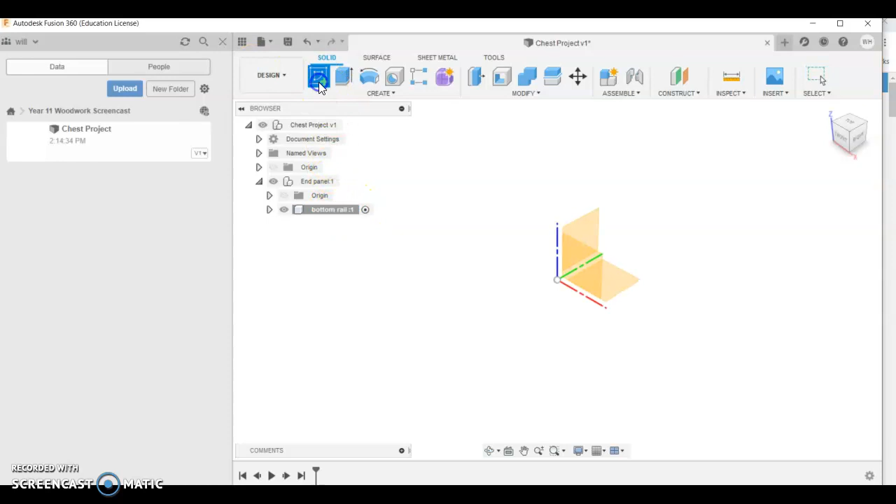You can see the activation dot is selected for that bottom rail, and we're going to start to draw it. I'm going to draw it on any plane, that's fine for this one. I'm going to draw a rectangle, so this is going to be our material size at 42 by 19.

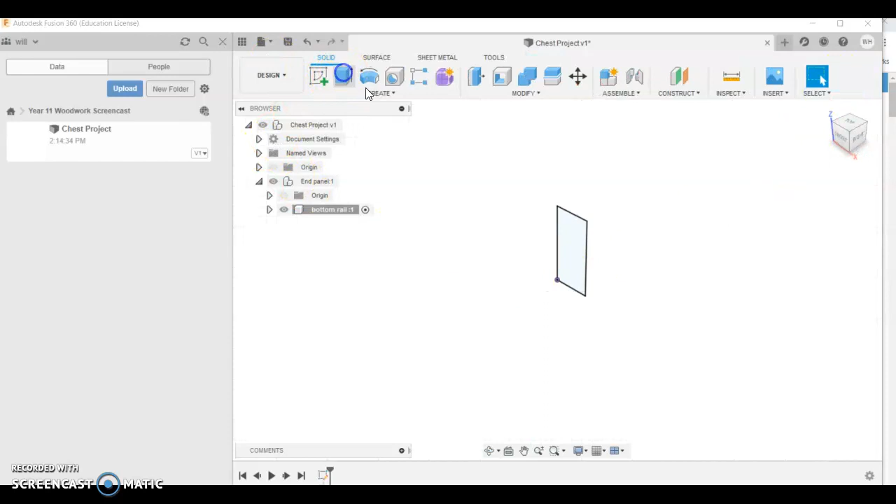The first, for the end panel, it's a 200mm rail. So once we've got the 42 by 19, we're going to finish it and extrude our work. So that's going to be 200. So we've got a piece of 42 by 19, 200 long.

Next thing I'm going to do is cut the groove in here. So I'm going to select the end and create a sketch. We're going to do a rectangle on the end.

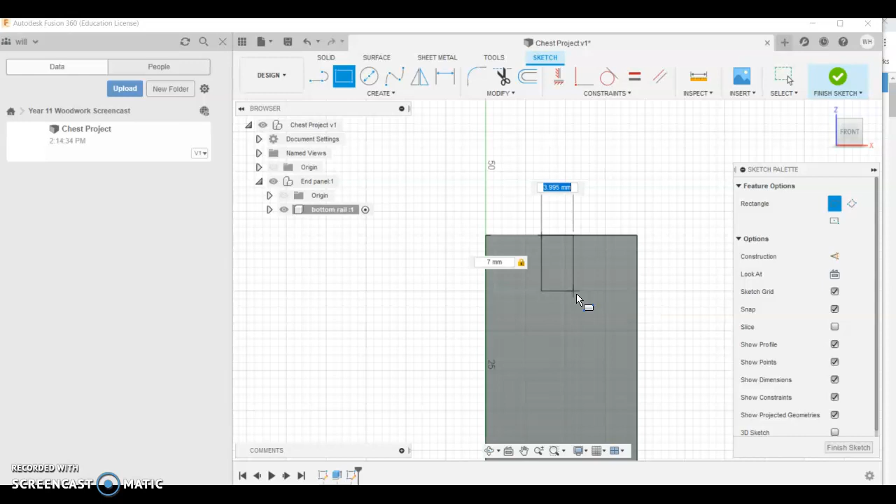It's going to be 7mm down. And I'm pressing tab to tab up to the next one. It's going to be 3mm wide because that's the size of our cutter.

Now I want to position this in the middle. The way I'm going to do that is with a little calculation. So between those 2 points, I'm going to start again. I'm going to go between, so the dimension between that line and that line.

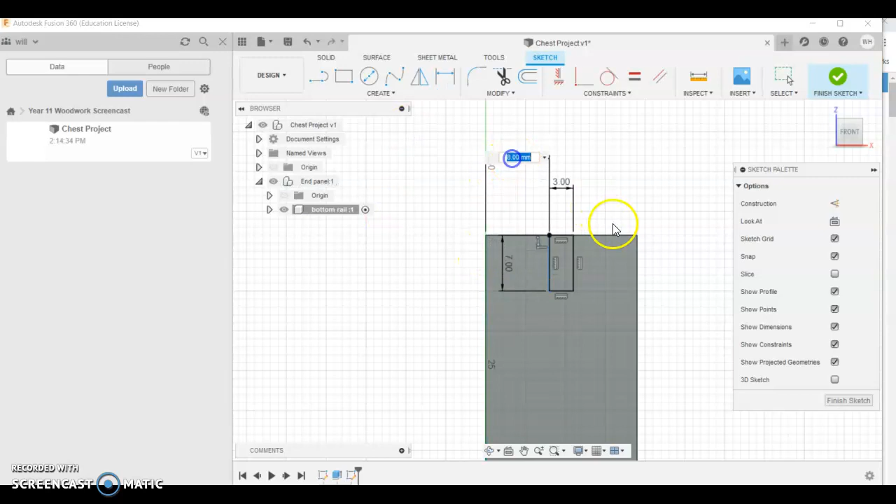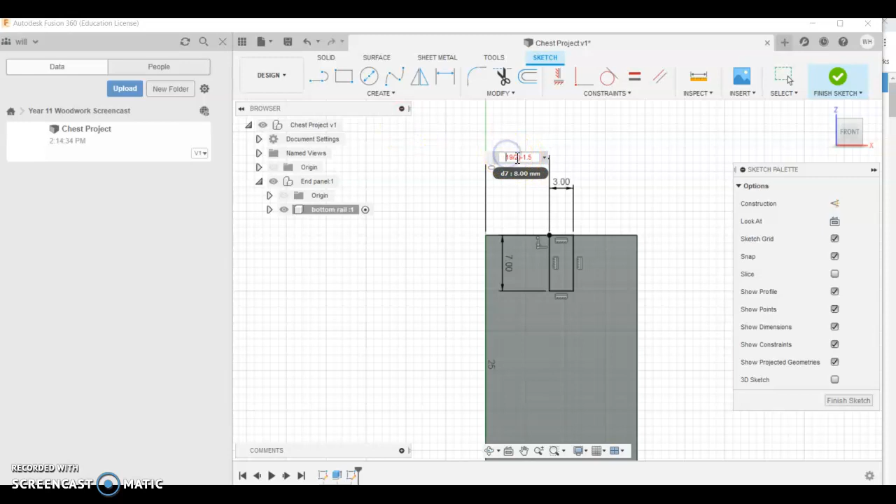We know that it's 19 from the overall size, so 19. We're going to take that, sorry, we're going to divide that by 2, and then we are going to take 1.5, which is half of the size that is there. I'm going to put this in brackets to make sure it does the division first, and I'm going to press enter to that.

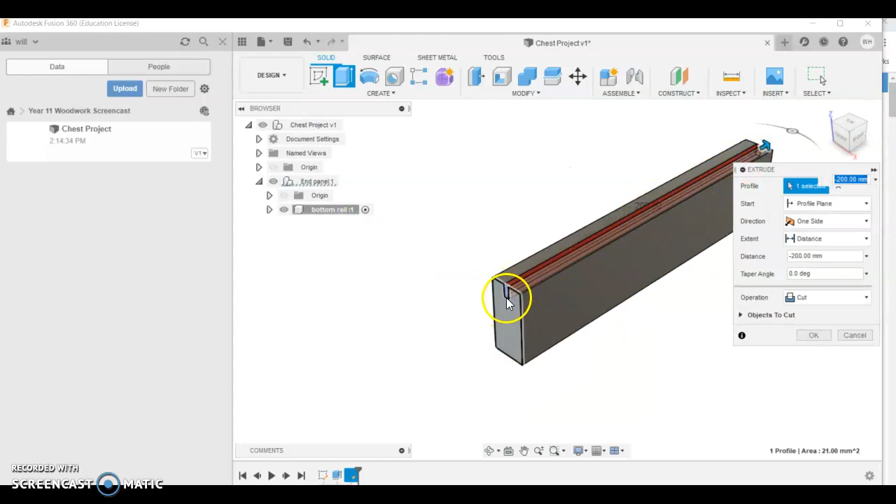Let's just double check that that's in the middle. That's good. Now what I'm going to do is finish the sketch and we're going to extrude that piece so it does a cut. Just like our piece, if it was timber, we have cut it to length at 200 and then we've done the route.

Using a router cutter, routed across the surface of the material to create that groove where the panel is going to sit into. Down here in our extent column, we can go to object and we can click the other side. Now, if we change the size of our work now, that will change with it.

If we didn't click that and just did a fixed distance, that groove wouldn't change with the size of this. So that's important for later in the project.

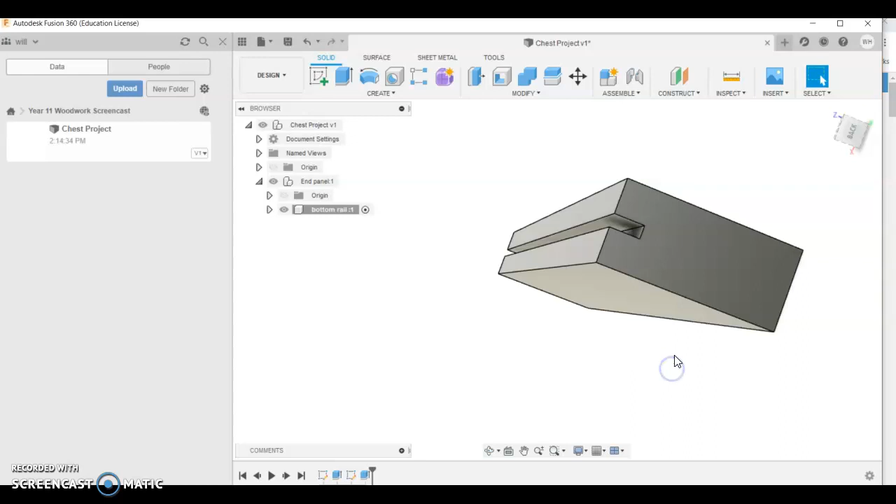So the next thing we're going to do is the dowel holes. If you choose not to do the dowel holes, that's okay. If you struggle with Fusion a bit, if you're aiming to get an A, I'd suggest that you do that.

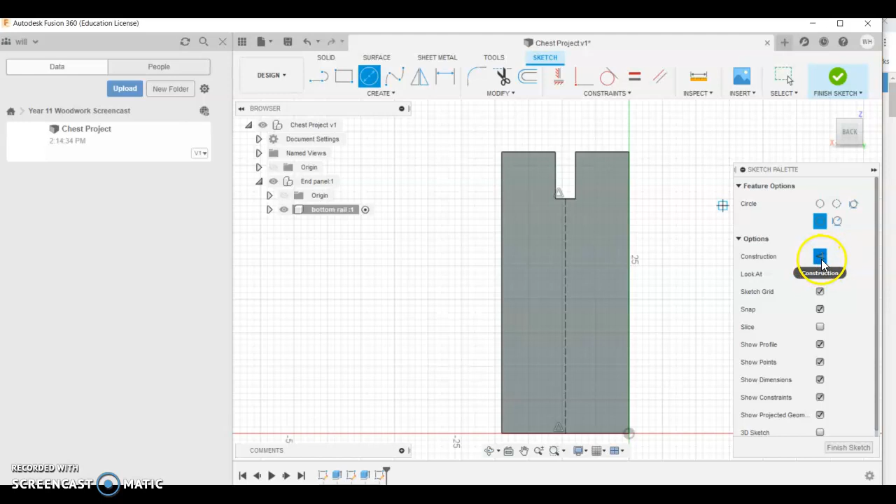So I'm going to get the center line here. I'll select construction line, which is over here, and then I'm going to put 2 circles on there. The dowel holes are 10mm in size, so 10. We're going to do exactly the same, so circle onto the center line, 10.

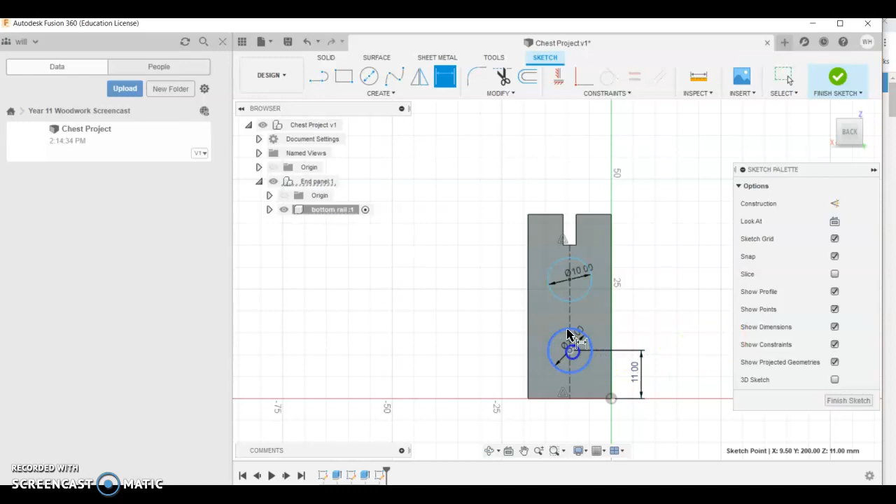We are also going to mark them out. So it's 11mm from the end. It's going to be 20mm in between the holes, and that should leave you an 11mm. Now that's a driven dimension, so this will give me an error, but you can see it's put in brackets.

Next thing we're going to do is finish that sketch and extrude it, and we're going to extrude these 2 pieces inwards.

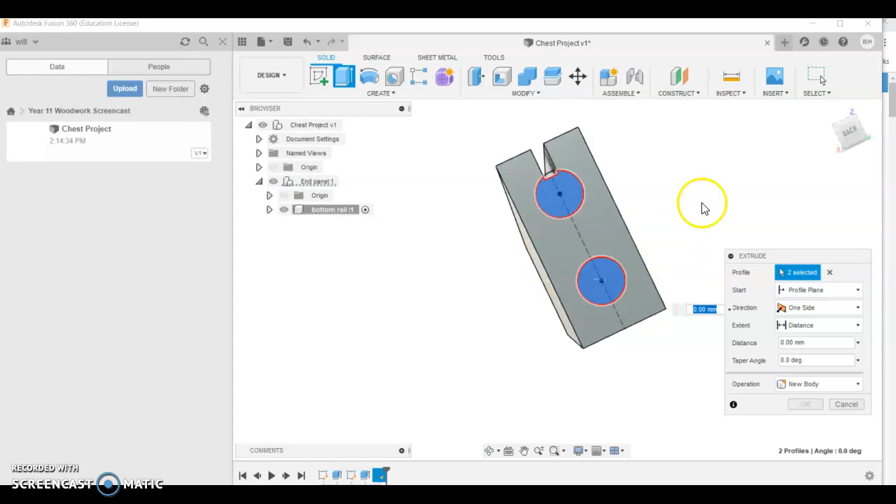I haven't actually measured the size of the dowel holes. We can change this later, but I'm going to bring it in something sensible. 20mm will be fine for now.

You can see that it's also cut in here between where our routed line was. That will actually happen with our piece, so it's not really anything to worry about there.

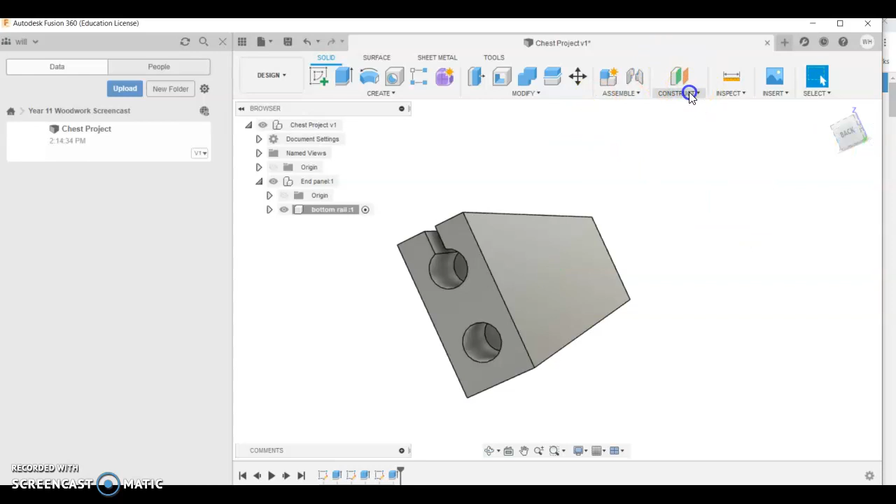Next thing to do is to set up a plane. So we want to do a mid plane between that side and between this side. Click OK to that, and we're going to mirror.

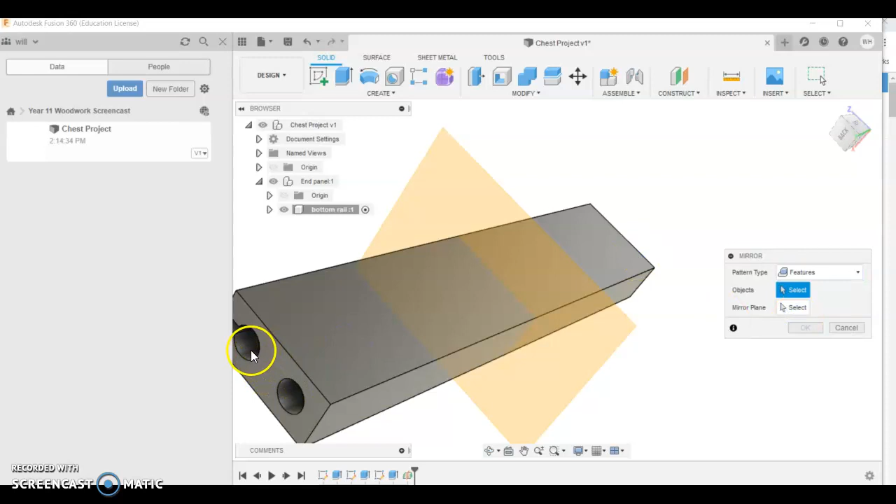So over here we can come down to mirror, and we're going to mirror the feature from this side. So let's just make sure this is set to feature, and we're going to mirror this feature, and the mirror plane is the one that we just set up. Click OK, and you'll see that's transferred onto the other side.

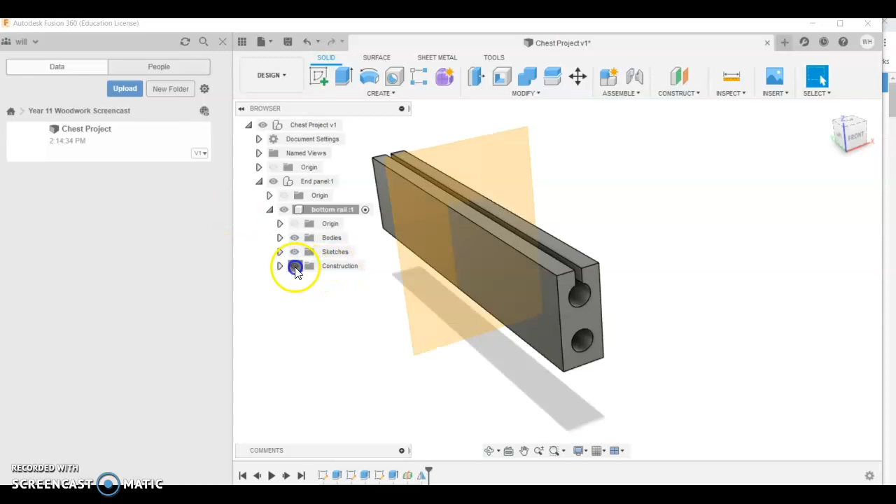If you want to hide this panel here, what we need to do is we can go into the bottom rail, and where it says construction, that's all your construction geometry, we can click the eyeball and turn that off. So I'd be leaving that off.

If I come back to my first sketch here now, and you can all test this, if I made that 300, you should notice that the routed groove comes the whole way still, and the dowels are cut in both sides as well. So that's perfect.

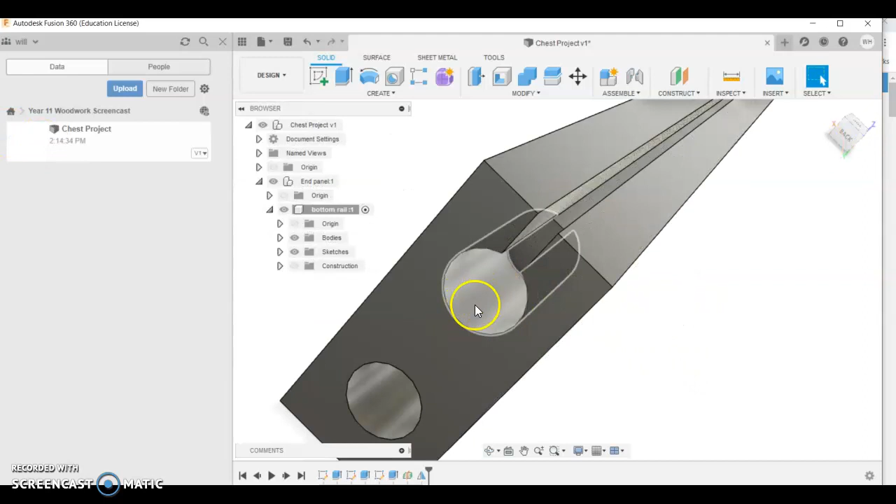I'm going to go back for that because we want it left at 200. Now we have got all we need for that one rail. We're going to duplicate this. I'm going to show you that in the next video.